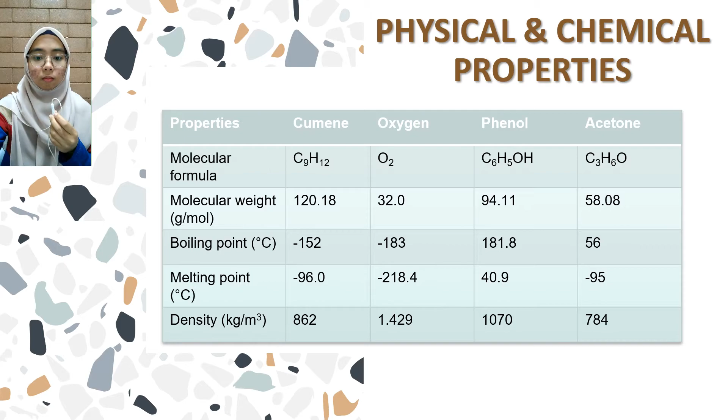We move on to the next slide, which is demand and supply of phenol. The demand of the global phenol market in 2019 was around 13.4 million tons, and it is expected to reach approximately 16 million tons by 2025, with an expected CAGR of around 3.4% during the forecast period. The global phenol market is expected to exhibit a CAGR of around 5.5% between 2020 and 2025.

The companies producing phenol are growing rapidly in various countries, so this is a list of some companies producing phenol.

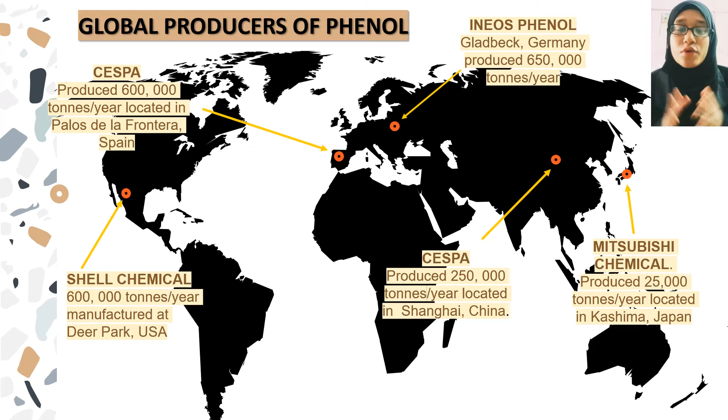The next part is future market potential. The phenol market was valued at RM 90.85 billion in 2019 and is projected to reach RM 125.12 billion by 2025 at a CAGR of around 5.5% from 2020 to 2025.

The growth of the sterilization industry and increasing demand for effective disinfectant due to the COVID-19 pandemic are the major drivers that have contributed to the growth of the market. Thus, phenol price has significantly increased over the last 5 years and will grow rapidly towards 2025.

Figure 2.3, the global phenol market, shows the historical market and forecast from 2015 to 2025. You can see the change in trend for the global phenol market.

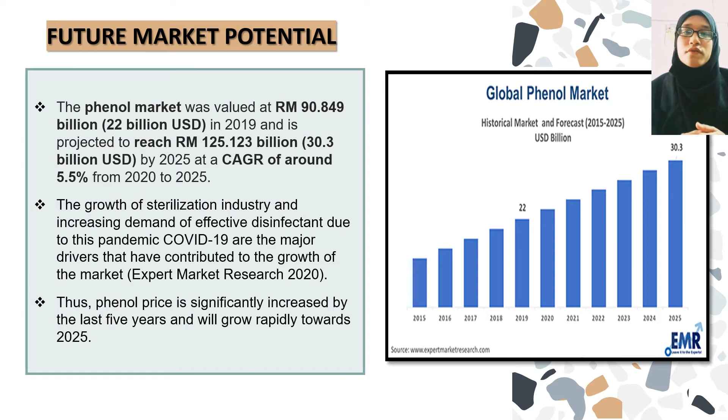Planned capacity of production of phenol. Based on the global demand and supply, by the year 2025, the production rate of the plant is estimated as below. The demand value is 16,380,000 tons per year. The supply value is 12,410,000 tons per year.

Next, we need to find the deficient by subtracting the supply value from the demand value. So we got 3,970,000 tons per year, and converting it into kg per year, we got 3,970,000,000 kg per year.

Next is the production time a day, 24 hours, and the maintenance time is 576 hours per year. So we find the production time a year: 365 days times 24 hours minus 576 hours, we got 8,184 hours per year.

Finally, we can find the plant capacity, which is 48,509 kg per hour, approximately 48,500 kg per hour, and converting it into tons per year, we got 468,000 tons per year.

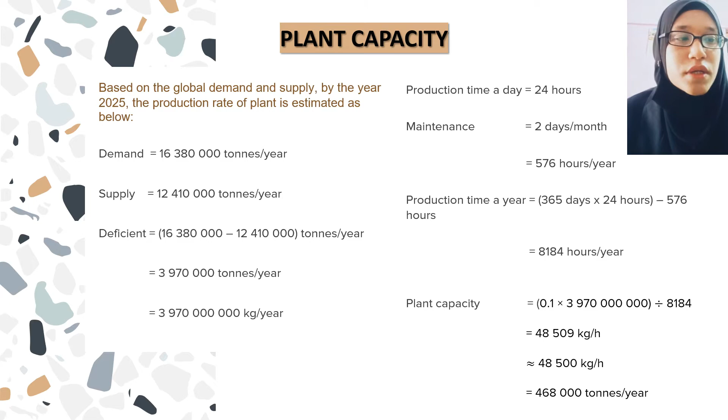For the production of phenol, the process chosen is through oxidation of cumene that occurs in a packed bed reactor. In the reactor, the reaction occurs at 85 degrees Celsius and 7 bar, leading to an intermediate product, cumene hydroperoxide, and an unwanted byproduct, dimethylbenzyl alcohol.

With copper oxide nanoparticle as catalyst, the reaction will occur with 80% cumene conversion and 75% cumene hydroperoxide selectivity.

Next, the product from the packed bed reactor will be fed into a flash drum to remove oxygen and nitrogen gas from the system. The remaining liquid product is then fed into a distillation column where dimethylbenzyl alcohol is removed through the bottom. The product in the distillate, which is cumene hydroperoxide and unreacted cumene, is then fed into a continuous stirred tank reactor.

In the CSTR, cumene hydroperoxide is decomposed to produce acetone and phenol with sulfuric acid as catalyst. The reaction occurs at mild conditions, 70 degrees Celsius and 5.5 bar, with 90% cumene hydroperoxide conversion.

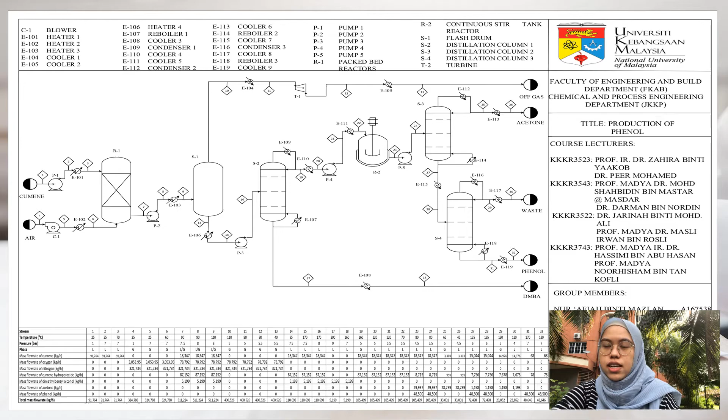For the packed bed reactor, the mass balance is calculated with 80% cumene conversion and 75% cumene hydroperoxide selectivity. The input stream table and output stream table are shown here, in which the flow rates calculated for input and output streams are balanced.

For the energy balance in the packed bed reactor, the heat calculated is negative 1.6 times 10^16 kJ per hour, where the negative sign indicates that the process occurring is an exothermic reaction.

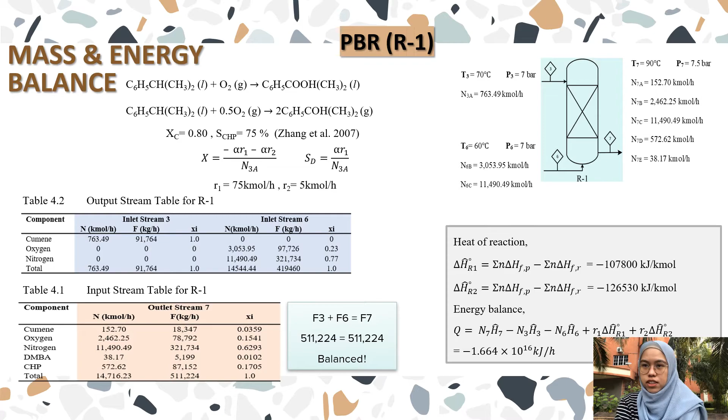Next, the mass and energy balance for the continuous stirred tank reactor is calculated and shown here. For the mass balance, the flow rates calculated for input and output stream is shown, and it is balanced with 48,500 kg per hour of phenol produced. For the energy balance, the heat calculated is negative 3.3 exponent 14 kJ per hour, which indicates an exothermic reaction.

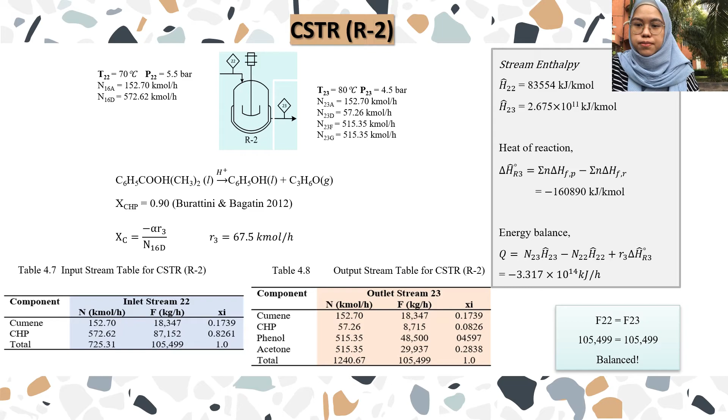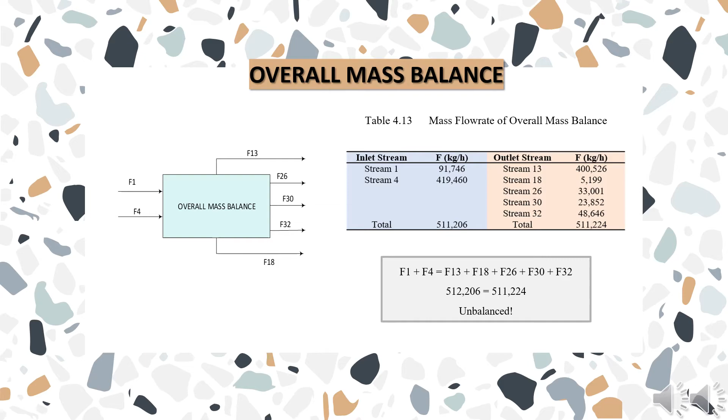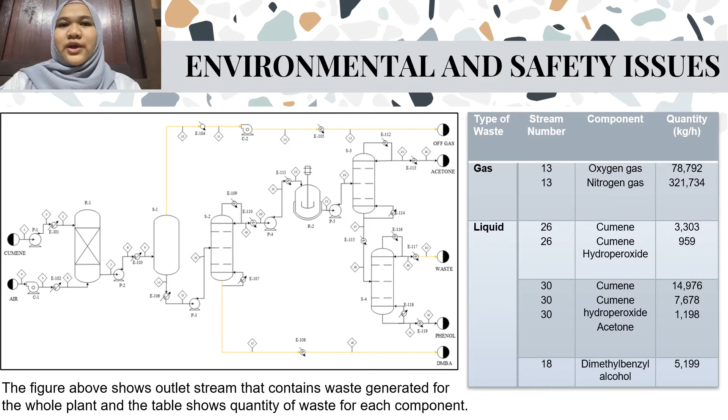For the environmental and safety issues, the yellow stream in the figure shows the outlet stream that contains waste generated for the whole plant, and the table shows the quantity of waste for each component, such as oxygen gas, nitrogen gas, cumene hydroperoxide, and dimethylbenzyl alcohol.

For the waste gas, nitrogen can be separated from oxygen by using membrane separation. The oxygen gas can be released to the air as it does not contain any hazardous effect.

Cumene is a waste chemical stream constituent. Incineration may be improved by mixing with a flammable liquid. For this CHP, the method for treatment of the cumene hydroperoxide is incineration.

And the last one, dimethylbenzyl alcohol. The best method is by offering surplus and non-recyclable solution to a licensed disposal company.

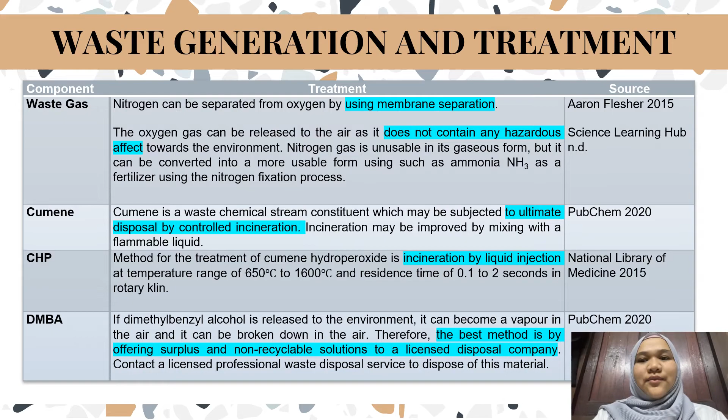The production of phenol from cumene is a liquid-based oxidation process, and it is a catalytic process. Catalytic processes are often carried out in a packed bed reactor, which is also known as a fixed bed reactor. Fixed bed reactor is used in this process. The reason why we are using this reactor is because of the plug flow behavior, lower maintenance cost, and improved contact between two phases in a chemical process.

The next reactor we are using in our project is continuous stirred tank reactor. CSTR is better for indefinitely long production runs of one product or a set of products.

The most widely used catalysts in the production of phenol include copper oxide nanoparticle (CuO) and sulfuric acid. Copper oxide nanoparticle is an excellent catalyst not only with regard to the reaction activity but also with regard to the CHP selectivity. The next one is sulfuric acid, which we use as a catalyst in decomposition of CHP, because of the high conversion obtained in producing phenol from CHP.

The next one is process selection. We are using the cumene to phenol process. This process produces high purity phenol and acetone via the cumene oxidation route, with advanced CHP cleavage for high product selectivity. The raw materials needed for our production of phenol are cumene and oxygen.

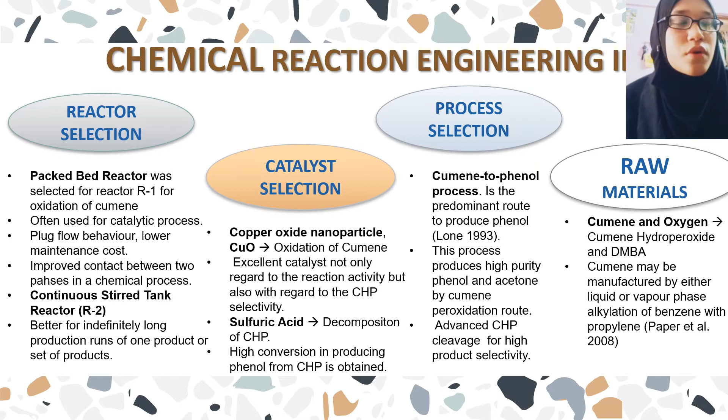Cumene will undergo oxidation process. As a result, CHP and DMBA will be produced.

Based on the general mole balance equation, flow rate of A in minus flow rate of A out plus generation, which is the integration of RA with respect to V, equals accumulation. We assume that the condition is steady state, so dNA over dt is equal to 0. Then we assume that the condition is well mixed, therefore RA is the same throughout the reactor. Then we obtain the equation below.

Then rearrange the generation term and write it down in terms of conversion. Finally, we find the mole balance of CSTR equation.

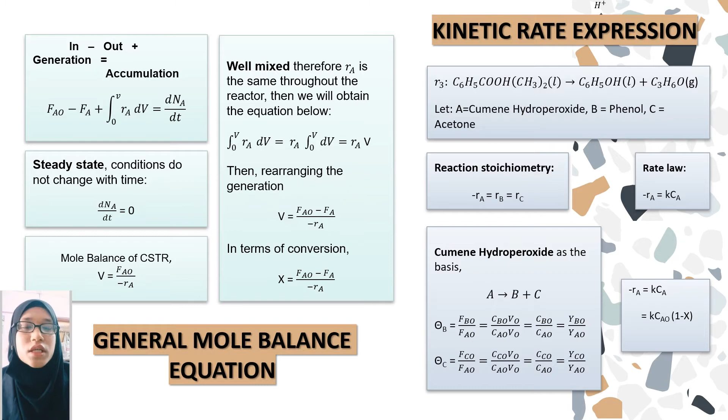Next is the kinetic rate expression. The equation shows the decomposition of CHP to produce phenol and acetone. From the equation above, we can find the reaction stoichiometry and also the rate law, which is negative RA equal to K times CA. By taking cumene hydroperoxide as the basis, we can perform the calculation and substitute into the rate law equation, and finally we find the kinetic rate expression, which is K times CA0 times (1 minus X).

For the separation process, the separation unit chosen is distillation column S3 for acetone removal. Distillation column is chosen due to the fact that acetone is a valuable byproduct and we wanted to maintain a high purity of acetone, which can be done using a distillation column.

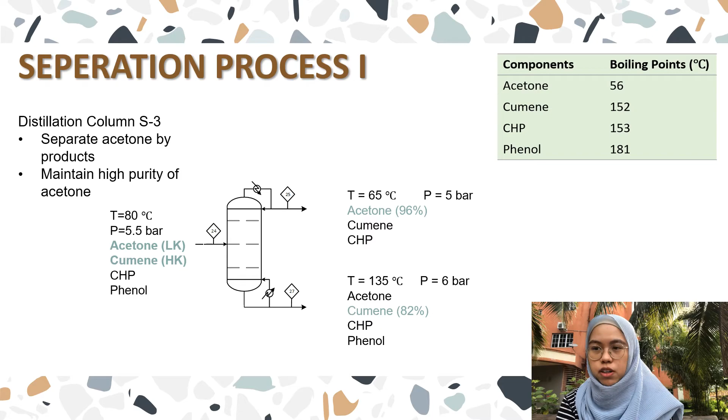The temperature for the distillation unit is selected taking the boiling point of the components into consideration. Acetone, the most valuable component, is selected as the light key component, and cumene is selected as the heavy key component. In the distillate stream, acetone is removed with 96% recovery, and cumene is removed through the bottom with 82% recovery.

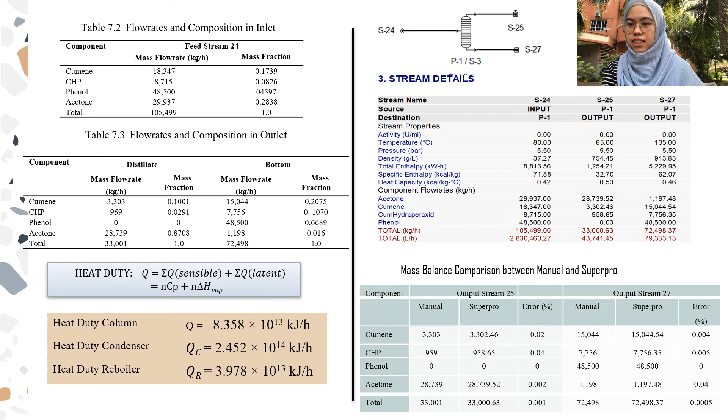Next, the table shown here is the flow rates and composition calculated from the mass balance. The mass balance value is compared with a SuperPro simulation software, and as you can see here, the error calculated is very small, hence we can tell that the calculation is accurate. The heat duty for the column, reboiler and condenser is also calculated and shown here.

Since there are 4 components involved in this distillation unit, we use the shortcut method to design this distillation unit, in which the minimum number of stages is calculated using the Fenske equation, and the calculated value obtained is 2 stages.

For the reflux ratio, we use the Underwood equation with Q equals to 0.60, and the reflux ratio obtained is 0.6664.

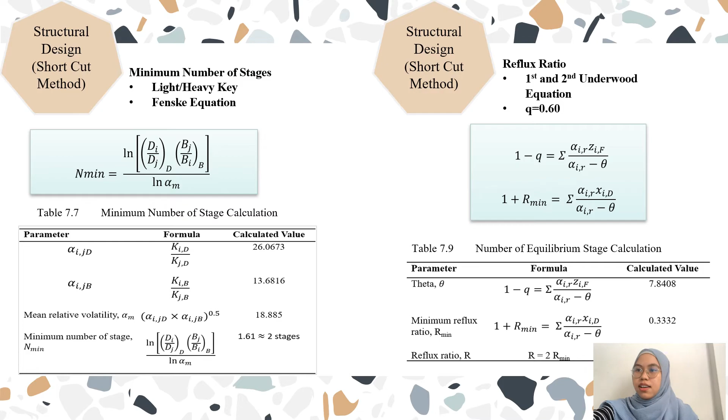For the number of theoretical stages, we calculated using the Gilliland correlation, and the calculation is summarized into a table. The value of theoretical stages obtained is 4 stages with tray efficiency of 50%.

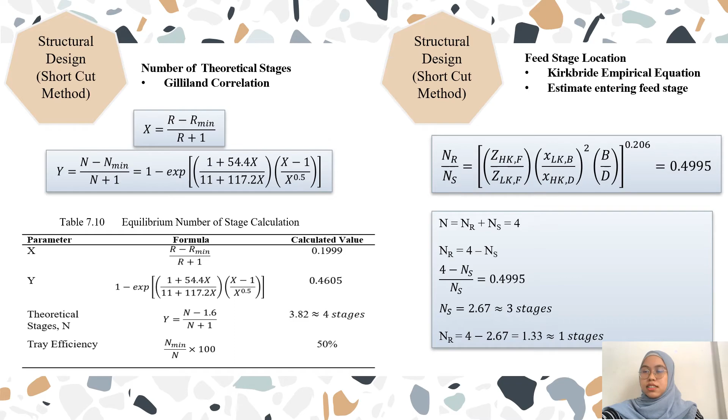For the feed stage location, we calculated using the Kirkbride empirical equation, and the number of stripping section stages is 3, and the rectifying section is 1 stage. Feed enters the distillation column at stage 1.

Lastly, the diameter and height of the distillation column unit is calculated, and the column diameter calculation is summarized in a table form. The value of diameter obtained is 0.385 meter, which is also equivalent to 0.4 meter.

For the column height, the height of tray is calculated by multiplying the tray spacing and number of stages, and the value obtained is 1.22 meter. The total height of the column is the height of tray plus an additional height, which is for the condenser and reboiler, and the value obtained is equivalent to 3 meters.

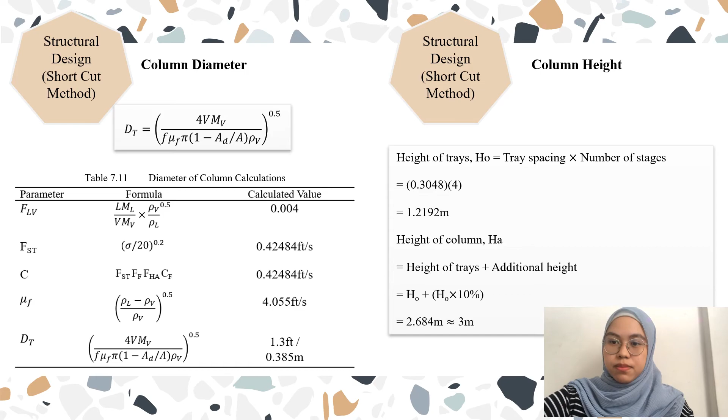For the computer-aided plant design chapter, SuperPro Designer and Symmetry Simulation is used to testify and validate the material balance for the production of phenol.

Here is the simulation report of the continuous stirred tank reactor R2 by SuperPro and Symmetry. Here we can see almost all of the percentage error is 0, so it is valid.

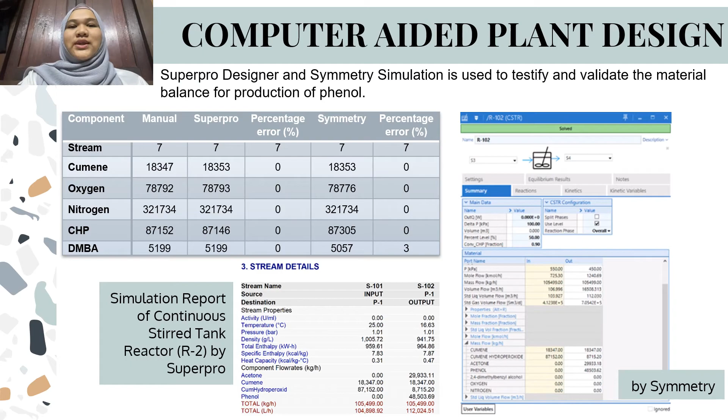Here is another example of the comparison between manual calculation, SuperPro and Symmetry simulation. We can see here the simulation report of the packed bed reactor R1 by SuperPro and Symmetry, and the percentage error for all the components is 0.

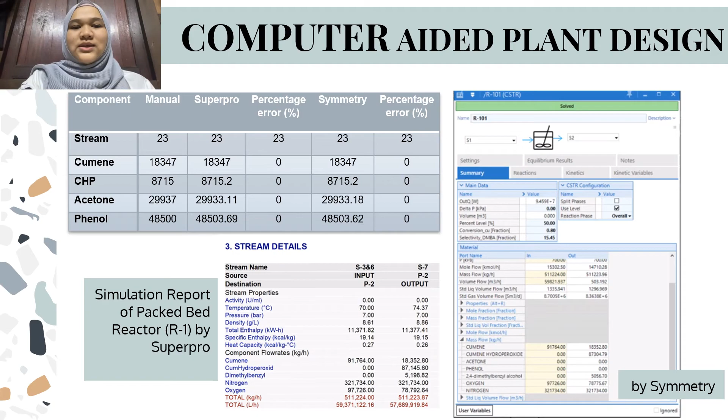Chemical Engineering Computation 2. This chapter has 2 parts. Part A, we need to develop a program of mass and energy balance for the distillation column. This program allows the user to enter any data to run the program.

For mass balance, the user is allowed to put only positive values. If the user inputs a negative value, the program will display a notification for the user to input a new positive value. The total inlet and total outlet from the program will get balanced.

The error between manual calculation and MATLAB we get is 0.0008%. For energy balance in MATLAB, the heat release we get is exothermic reaction, same as manual calculation. The error percentage between manual calculation and MATLAB is 0.0215%.

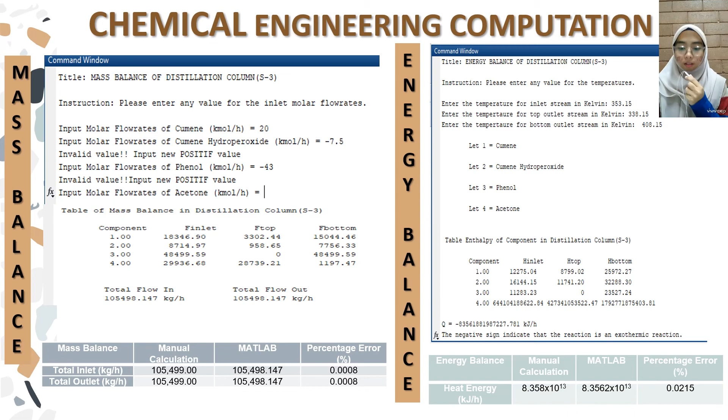Numerical method is used to validate one parameter from Part A. The method we use is Newton-Cotes formula, which is the trapezoidal rule, and the parameter we use is inlet enthalpy of cumene of the distillation column. This is the equation we use.

From the program, I indicate the inlet enthalpy of cumene, and the value we get from the program is 12300.327 kJ per kilomole. So we calculate the error between the manual calculation and the coding we developed.

The error is 0.206, and for the error of the trapezoidal rule we get is 0. Since the error is 0, the parameter is valid.

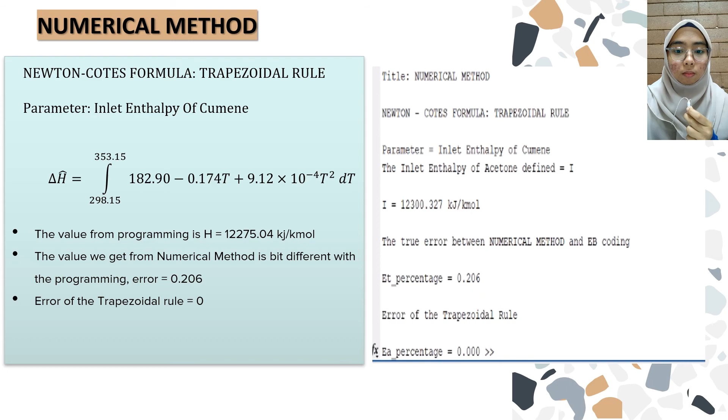As conclusion, phenol is an aromatic compound used in hospitals as a phenol-based disinfectant. Phenol is synthesized from decomposition of cumene hydroperoxide and produces a side product, which is acetone.

Waste product for our production is cumene hydroperoxide off-gas and dimethylbenzyl alcohol. Our plant capacity is 48,500 kg per hour, with conversion of cumene hydroperoxide in CSTR being 90%.

Heat release from PBR is negative 1.664 times 10 to the power of 16 kJ per hour, and in CSTR is negative 3.317 times 10 to the power of 14 kJ per hour, and this indicates each reaction is exothermic.

Catalysts involved in our production are copper oxide nanoparticle and sulfuric acid. Rate of reaction of CSTR is negative Ra equals to Kca, with rate constant value of 0.00064 per second.

Number of stages of the distillation column we get is 4 stages, and SuperPro and Symmetry are used to testify and validate the mass balance to produce phenol. By using MATLAB, the program is developed to find mass and energy balance and to compare with the manual calculation. That's all from us.